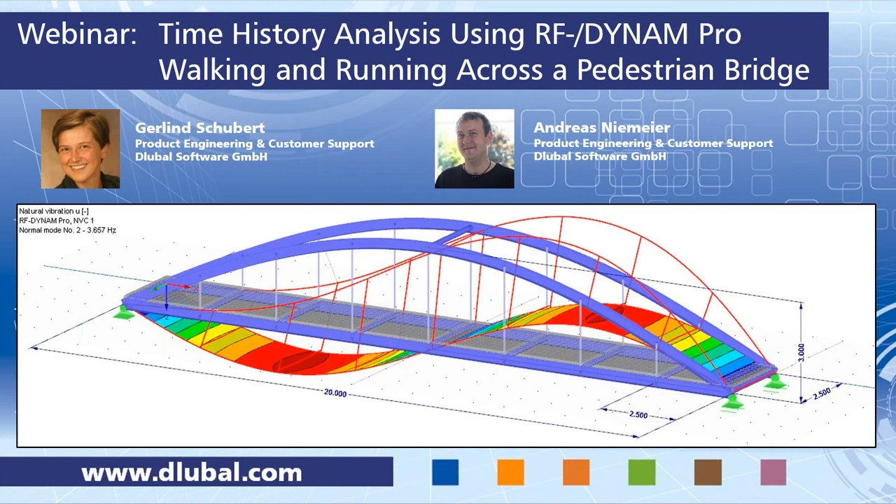We want to talk about time history analysis today and how to use RF-DYNAM Pro, and we will simulate walking and running across a pedestrian bridge. My name is Schubert, I will demonstrate the webinar today and show you the example in RFEM, and my colleague Andreas Niemeier will help me throughout the webinar answering all your questions. This is the model that we look at today, an arch bridge, and the persons we simulate are walking in the center along the bridge here. So we simulate an excitation which is changing in time, but also changing in position. That's the important bit today.

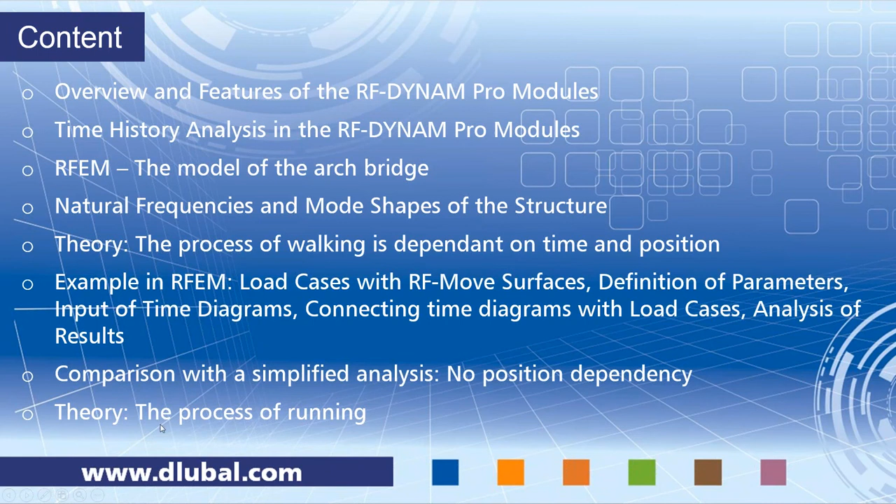Now you know what to expect, and we start with the overview of the modules. We have three dynamic modules in RFEM. This is the same in RStab, so we have two program families, RFEM and RStab.

Dynamic modules exist in both, and they are very similar in both. In RStab, you can only consider members, while in RFEM, you can also consider surfaces and solids. So this is the main difference, but the dynamics modules themselves are very similar. So this webinar is also useful for RStab users, not only for RFEM users. We have the module RF-DYNAM Pro Natural Vibrations.

Which you can use to analyze frequencies and mode shapes for member, surface, and solid models. You can directly import the masses from load cases, and you can combine these mass cases in mass combinations. You can also import stiffness modifications.

For example, to consider the pre-stress of cables, or you can deactivate some members. You could consider the stiffness from RF-Concrete and so on. So this is considered as initial conditions.

The whole dynamic module at the moment is based on linear calculations. We have several eigenvalue solvers available and everything you would expect from a modal analysis, so you get modal masses, effective modal masses, and modal mass factors, and so on.

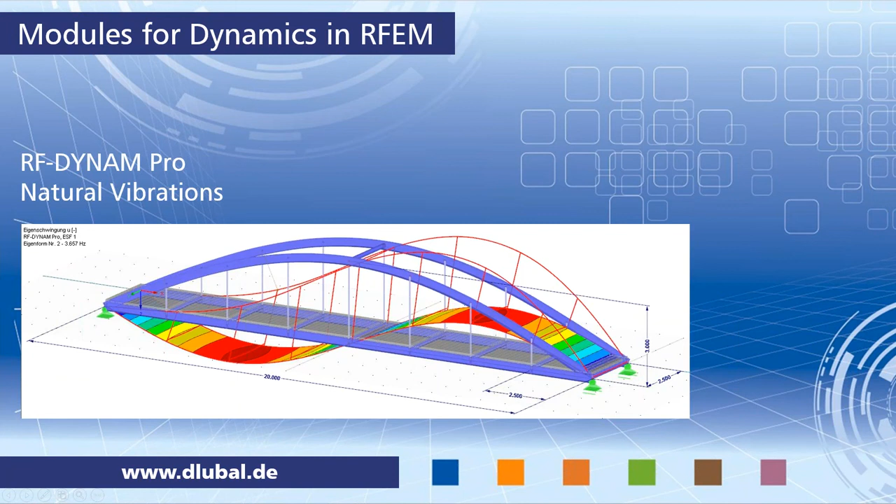Then we have the module RF-DYNAM Pro Forced Vibrations, which is based on the natural vibrations, so you obviously need the natural vibrations as a basis. This module, Forced Vibrations, contains both the time history analysis, which is what we want to look at today, and the multimodal and multi-point response spectra analysis.

So today we consider only the time history analysis, and I'm concentrating here on the introduction only on this one. The response spectra analysis is to perform an earthquake analysis.

This is just a preview of the time course monitor. We will see this later on in the example again. This is how you can see the results in graphs versus time.

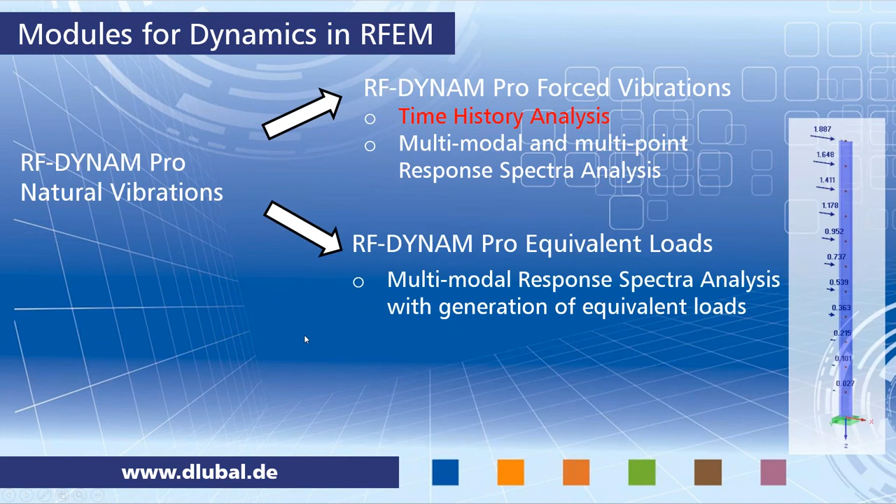And then we have the module RF-DYNAM Pro Equivalent Loads. This contains a multimodal response spectra analysis. It's the same approach, but here you get equivalent loads calculated and exported into load cases, which you can use then in RFEM.

So like in this little example here. I don't go into detail on this equivalent load module. There is another webinar available which I did earlier, about a natural vibration analysis and equivalent load analysis of a framework.

You can just have a look on our website, and you can always see previous webinars. You can download them or watch them directly as a video. That's possible with all of the webinars we did earlier on.

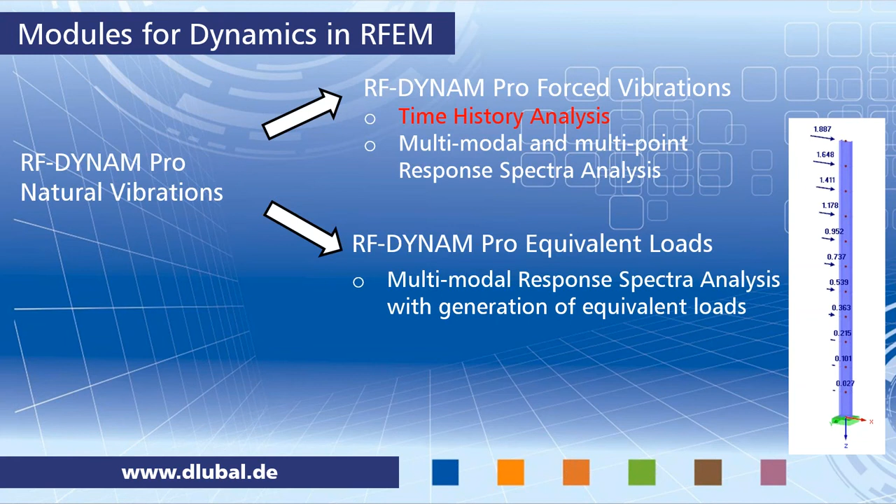As I said, we will have a detailed look into the forced vibrations, into the time history analysis. So we have direct integration implemented, using the implicit Newmark solver. Here also you have different Newmark solvers available in the literature.

We use the average acceleration method, so you could have a look in the literature for further details here. For example, Wilson's Structural Dynamics is just one book I can mention, but there are many good books available about structural dynamics.

Very important for the Newmark solver is to have a small time step. It needs to be small enough to get accurate results. I'll come back to this point later on and give some recommendations for the time step.

We have the structural damping implemented, so you can choose between the Rayleigh coefficients and the Lehr's damping, and you can enter them vice versa. This is converted internally, so you can choose whatever you prefer.

We present the results in a time course monitor and also in result tables. The time course monitor I showed you already, and we will see it also in the example again. You can export results from single time steps, and you can also export result combinations, which is then an envelope over time.

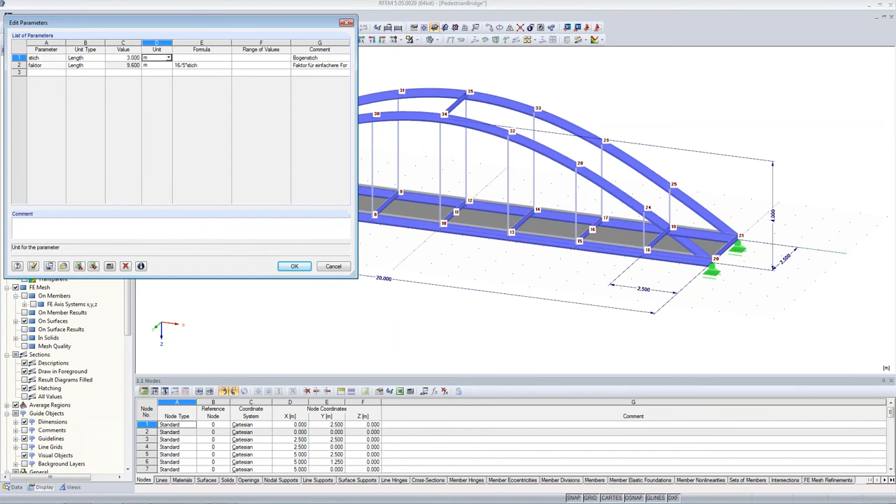So I already used some parameters in modeling the bridge. I want to undo this. So this is as it was originally. So we will use parameters quite often today, and I used them already in the model. I don't want to go too much in detail here.

I defined a thin surface, which is just a thin concrete surface here. This is just a simplified model. Usually you would define an orthotropic surface here. But I need the surface to define my moving loads later on with the add-on module RF-MOVE Surfaces, and that is why I defined a surface.

And there's also a webinar available about how exactly this bridge was modeled and how the parameters were defined, and this is shown in a webinar called Parametric Modeling of an Arch Bridge. And this is again available on our website. I will show you at the end of the webinar how you can access the webinars and how you can download them and so on.

So this is all about the model. We go into the add-on module already. Here we go, RF-DYNAM Pro, dynamic analysis. There are several ways to open add-on modules. You can also open them from here, dynamic, and then RF-DYNAM Pro. And here you see again the separation into the 3 add-on modules: natural vibration, forced vibrations, and equivalent loads. And we start just with the natural vibration analysis, and we don't need mass combinations today. We keep it all quite simple.

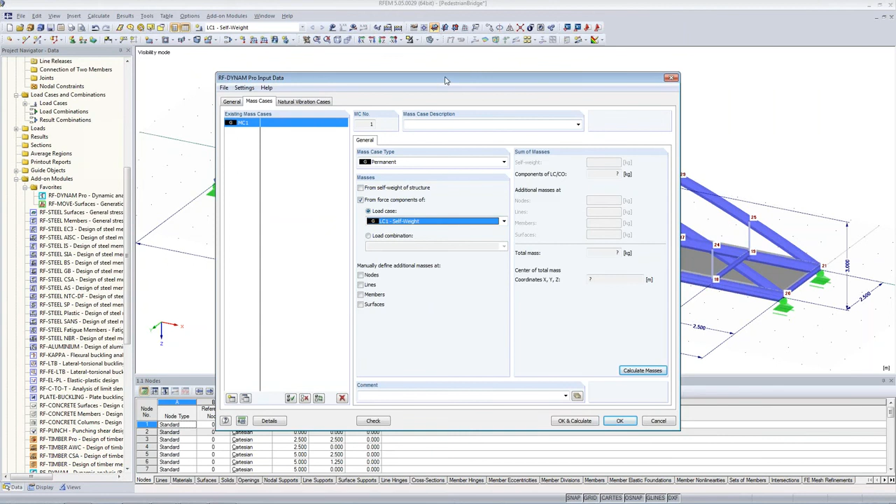I go into the mass cases, and I just want to import the load case self-weight that I defined. And this includes the self-weight of the bridge and another 4 kilonewtons per square meter for further footway structure that is not modeled itself, that I just apply as a load. So I import here the loads of the self-weight load case. And it is important to clear this checkbox here, otherwise you would double the self-weight.

You can calculate the masses internally if you want. If the model is too big, I don't really recommend this, but you can. This is for double checking the masses you actually import here. You could also define nodal, line, member and surface masses if you need, so you can define them manually to add, for example, something which is not modeled itself or which is not included in a load case. You can add this manually here. So just as an option. So you have several options already here.

Then we have the natural vibration cases, where we import our mass case, and where I want to have a look at the first 10 eigenvalues. And I just apply a diagonal matrix, which only considers the masses in translational directions. And I use the Lanczos solver, which is recommendable for this size of structure. So it's not as big. It's a quite quick solver here.

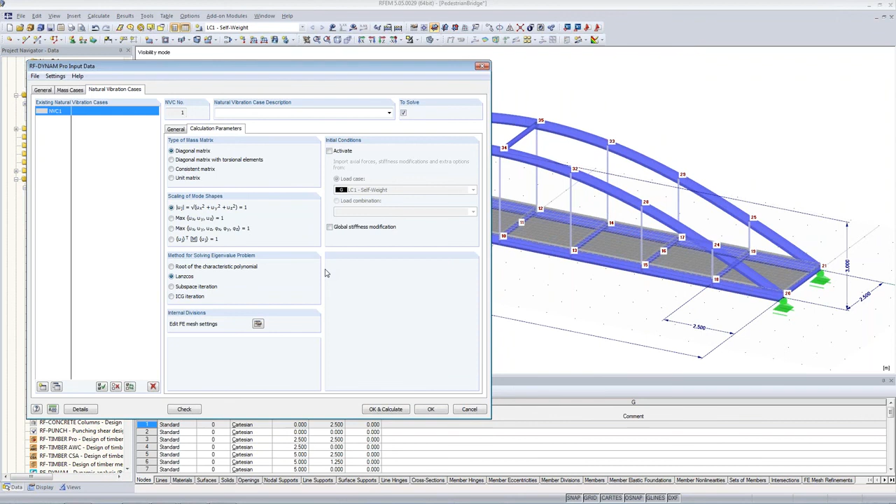It's quite fast. Here's the part where you can import the stiffness modifications, as I said in the introduction. But I go more into detail of these natural vibration cases in the other webinar I mentioned already. And I show you at the end where you find it so that you can watch it afterwards. So here we go. I just want to calculate the natural frequencies first of all.

So we have the dynamic results available in the main program RFEM. You reach them with this button, that's table 5, dynamic analysis. And you have several drop-downs here. At the moment, we have just one natural vibration case. That's why the drop-down doesn't contain anything else. We will see this increasing later on. And we can select the mode shapes in this drop-down, or we can just go through the table and look at the mode shapes in the graphic. This is updating automatically.

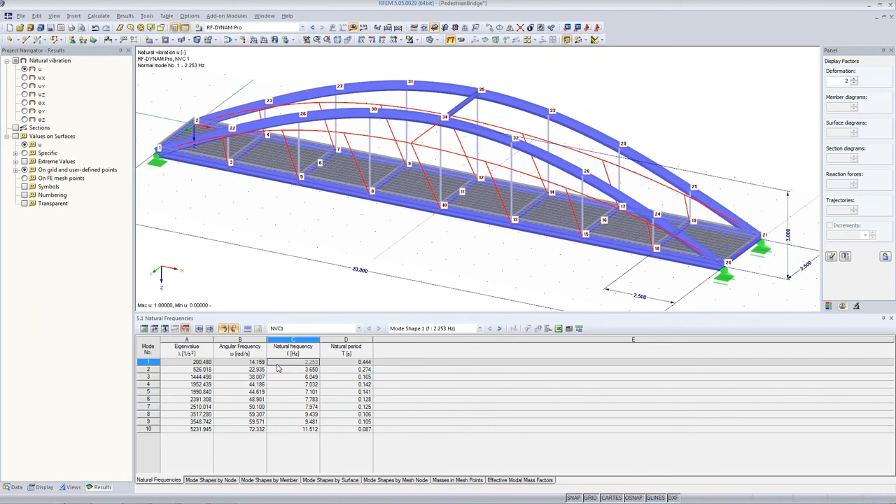So let's have a look at the first one. This is just the arc going to the side. And this one is relevant for us. This is the second mode shape with 3.65 Hertz. And this is the most relevant shape for us today, because this is the shape of the footway.

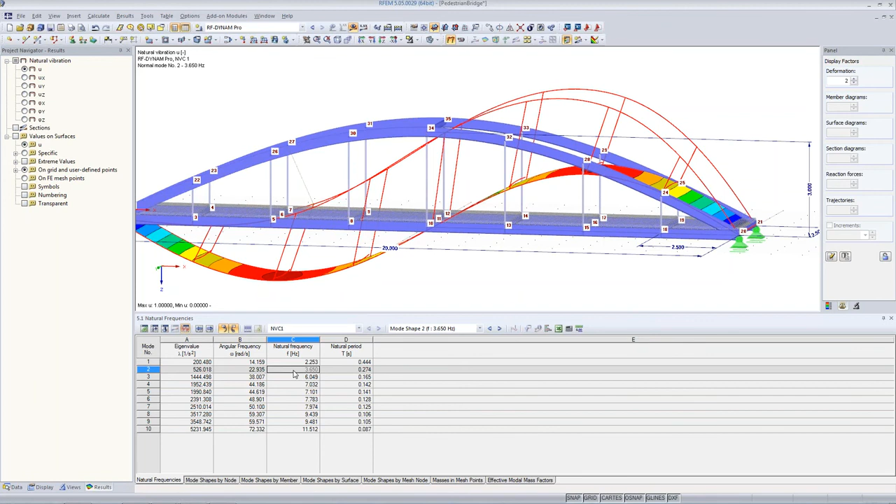And what we learn also from this mode shape is that our critical load points are in the quarter points of the bridge. So it's not in the middle of the bridge, it's in the quarter points. And the frequency, 3.65 Hertz, is below 5 Hertz. This means we have to consider the dynamics. We have to study this. As you all know, pedestrians are walking with approximately 2.5 Hertz. So this is relevant today.

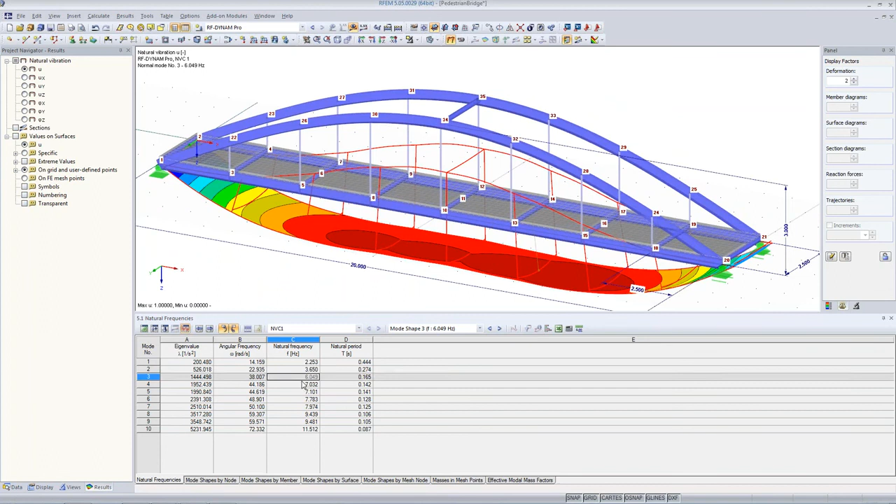Okay. And we can have a look at the other mode shapes just to complete this. So here the footway is going down. Here we have a crossing arc. Here this is twisting. The whole footway is twisting. Second mode shape of the arc. And the third mode shape of the footway.

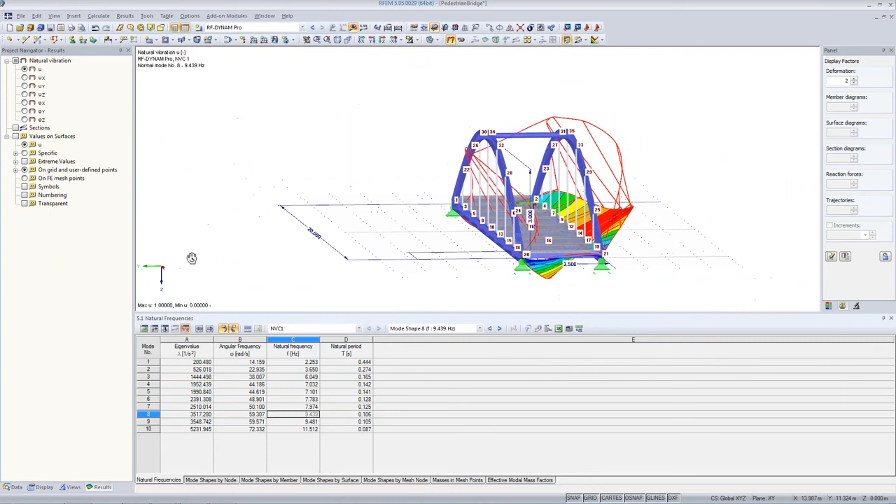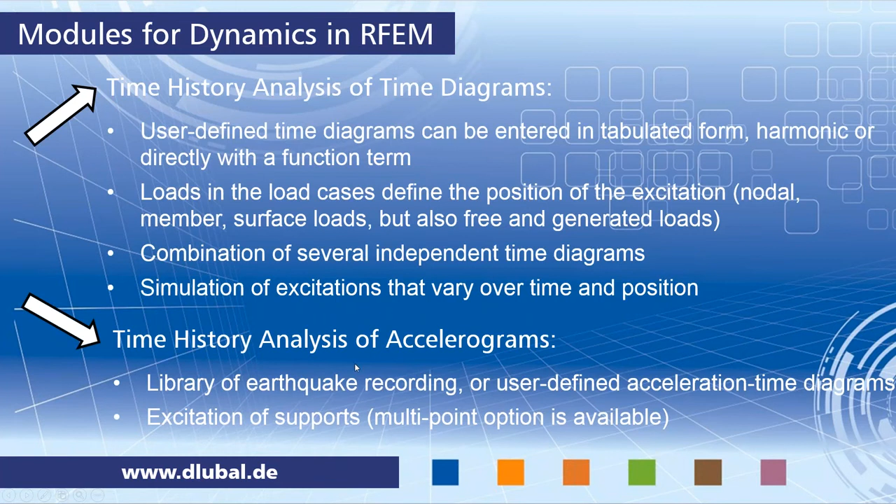And this is drifting away completely here. And the last one I want to show you is this one. Okay, so quite interesting mode shapes. For us, the most important mode shape is this one. So we go back to the presentation, and I want to come to the details of walking.

A walking person is usually walking with a step frequency between 1.7 and 2.3 hertz, and with step lengths of 60 centimeters to 1 meter. So this is usually the case, and you have to choose whatever is the worst case for your structure. In our case, we have a field length of 2.5 meters. So we will use a step length of 62.5 centimeters to be exactly in the center of every field. This is what you have to think about before you actually work out all these formulas. It depends on your structure.

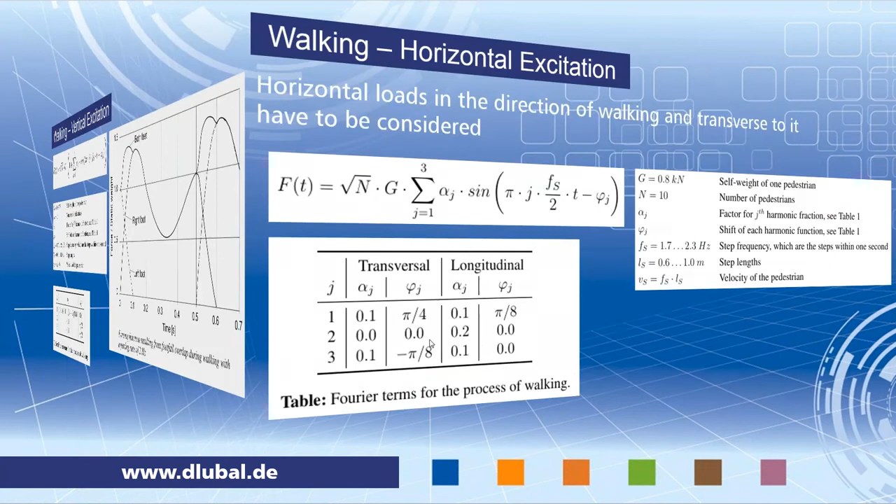The next one is the walking. Walking also leads to some horizontal excitation, which comes from the push of the foot in the direction of walking and from the movement of the upper part of the body transverse to the direction of walking. This is much smaller than the vertical load, and it only considers half of the step frequency because all this is only happening either in the left or the right direction.

So I just want to show you this formula here. It's quite similar. It's a sinus function as well. It consists of 3 Fourier terms, and you have the weight of the pedestrian. This is the number of persons. I'll come back to this later on. We had this in the formula for the vertical excitation as well. I'll explain later how this is calculated or what kind of assumption you have to make here.

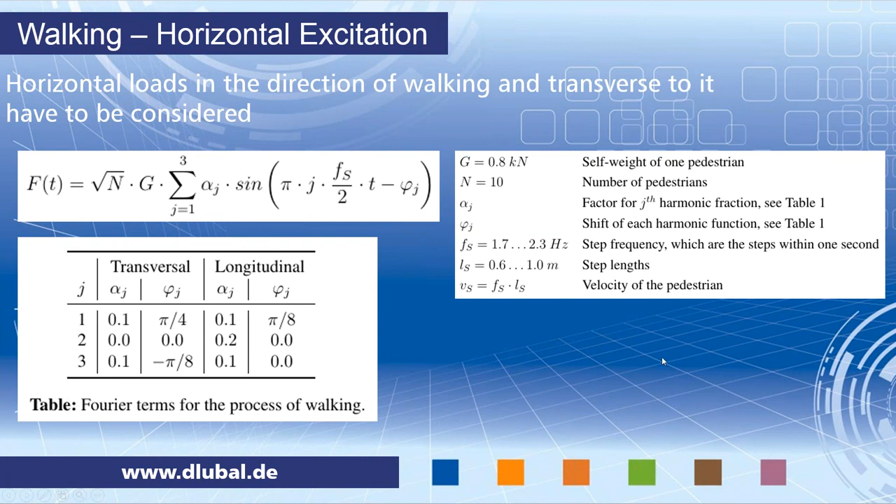We don't consider the horizontal excitation in our example today, but this might be quite important, and you have to consider it if your bridge is quite soft in the horizontal direction. So this might be important, but it's too much for this 1-hour webinar today. That's why I excluded it from today's example.

As I said, we come back to the number of persons. Multiple persons on a bridge do not increase the load by the same factor. These persons are not walking synchronously, they are just walking randomly. So that's why you don't multiply by 10 because you have 10 persons on the bridge. That's why in the formula you have the square root of the number of persons.

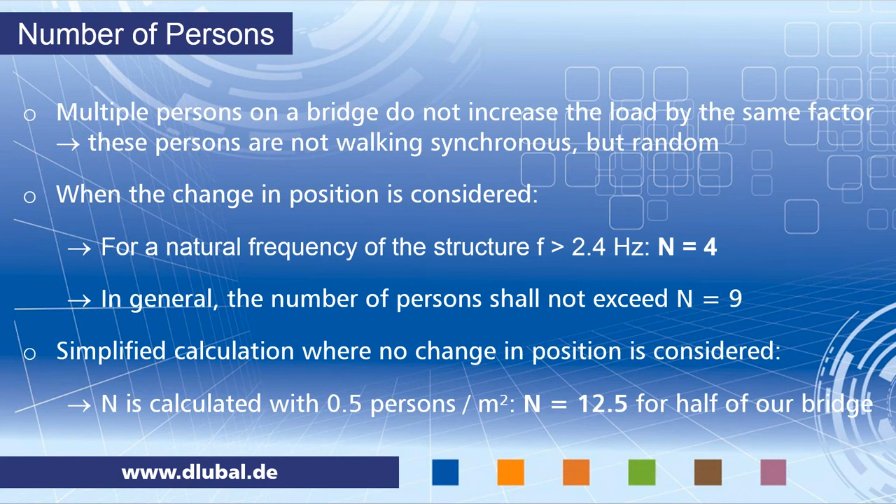And then you have to think about how many persons are actually on the bridge. If there are too many persons on the bridge, then you don't consider a dynamic problem anymore. If you think about a stream of pedestrians or a crowd, then this is not dynamic. These persons are not walking or running anymore, they are kind of moving slowly, statically. We want to consider the dynamic case, and you find several assumptions in different standards. For example, the Eurocode suggests 10 to 15 persons, and it also depends if you consider the change in position or not.

So we start today with the detailed implementation. We study the change in position, and I found the recommendation: if the natural frequency of the structure is greater than 2.4 hertz, which is the case for us, you have to consider 4 persons walking along the bridge. And in general, the number of persons shall not exceed 9.

When you do not consider the change in position, so when you simplify the calculation, then you need to consider more persons. Then you should consider half a person per square meter, which would mean for our whole bridge 25 persons. But that's not realistic in our case, because our relevant mode shape, as we have just seen, is the second mode shape. So our critical load points are the quarter points, and that's why it's more realistic to consider only half of the bridge. So in the case where no change in position is considered, I would assume 12.5 persons on the bridge.

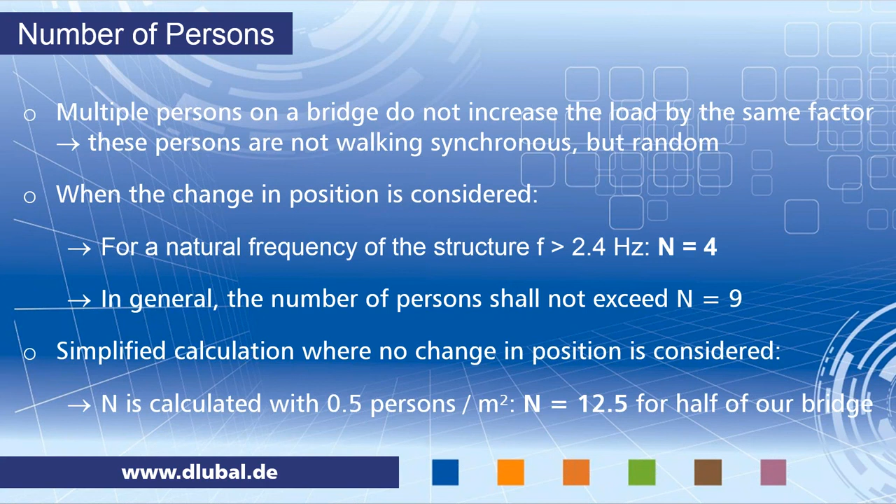So these are assumptions. It's not very well regulated in the standards. Then I already said that the choice of time step is very important. This is a compromise between accuracy of the results versus calculation time. The smaller the time step, the longer it calculates, but the more accurate the results. There are some recommendations available: you should choose the largest natural frequency of your system that is relevant for the system response, apply this formula, and then you get a delta t.

In our case, the relevant frequency of our system is 3.6 hertz, and this formula leads to 0.014 seconds. The second one, also relevant, is the largest frequency of the excitation function. So not only the structure is important, also the excitation function. The largest one is 6 hertz, so we end up with 0.0083 seconds, which is already a bit less. I did a convergence study in advance of this webinar with larger and smaller time steps, and I ended up with 0.01 seconds being good enough and leading to accurate results.

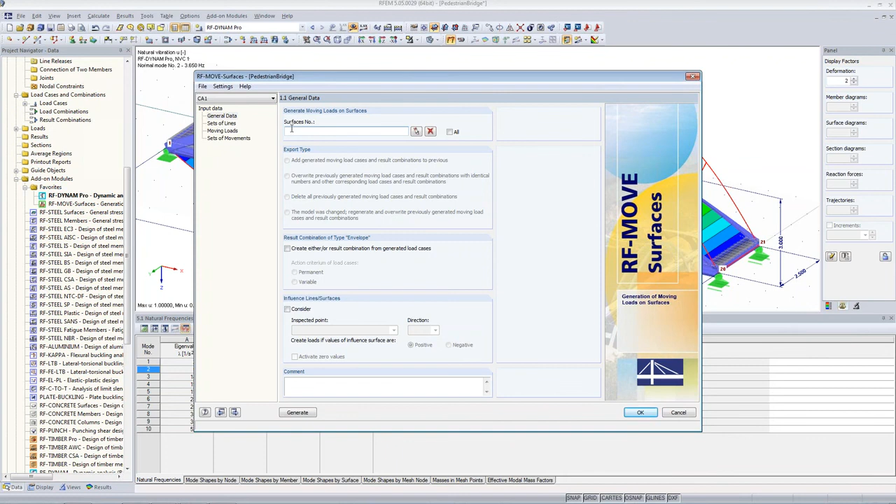We want to have loads on all of our surfaces, so I apply the checkbox all surfaces here. This is all I have to do in the general data. Then the sets of lines. We have these pictures here that help us understand what's going on. I start with the right foot. As I said early on, we will have a step length of 62.5 centimeters. This means that the right foot comes to the ground every 1.25 meters. That's the moving step, 1.25 meters up here. And I apply also an offset at the beginning and at the end.

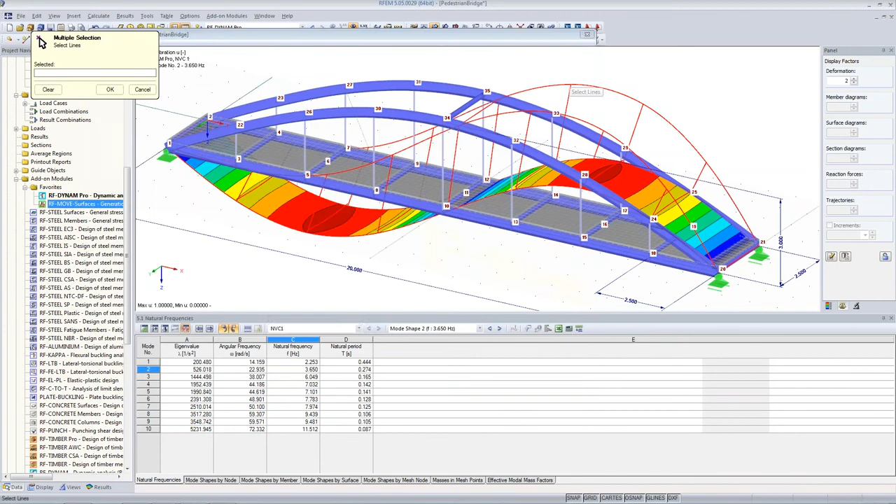Here I have to choose some lines, select some lines, and I select those lines here. And then I have to define an eccentricity from there, so to define how far away from this line my persons are walking. So in my case, I want the persons walking in the center of the bridge, and I decided to have the feet 30 centimeters apart from each other. This is something you could neglect, but I want to study this today.

So I say that my right foot is 1.1 meter from these lines we've just selected. And I have to apply a minus here. This is something you have to try. It depends on the direction of your lines. And my lines are going away from node 20, so that's why I apply a minus here. So this is the right foot.

I create a new set of lines, which I call left foot. And this is with the same moving step of 1.25 meters. And now I have a larger offset. This is something you have to try out. This is just because my left foot is one time less on the bridge than my right foot. Well, it's just through the process of walking. So minus 1.4, as I said, 30 centimeters apart.

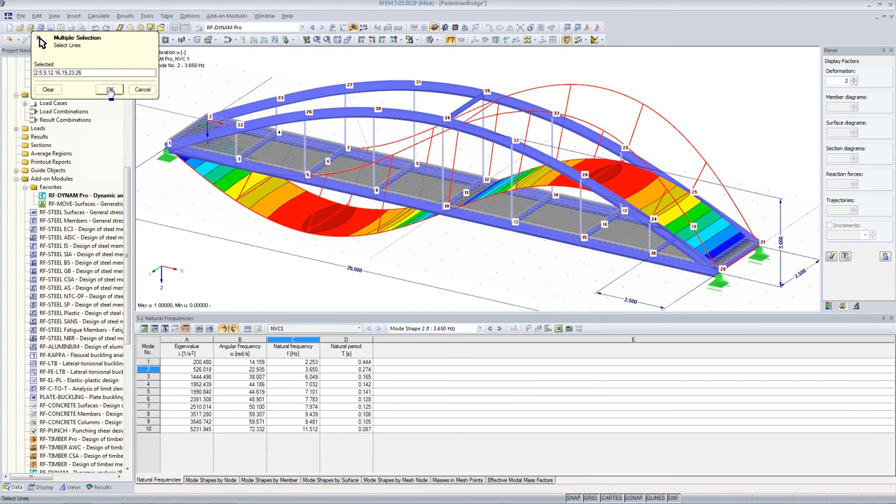So the next one is moving loads. We have both feet. So this is just the load itself we define here. So both feet, which is a concentrated force. And I want to just define 1 kilonewton here. That is because I want to define all the multipliers and the actual size of my force in the module RF-DYNAM Pro, because in RF-DYNAM Pro I can use parameters, and this makes it more flexible at the end.

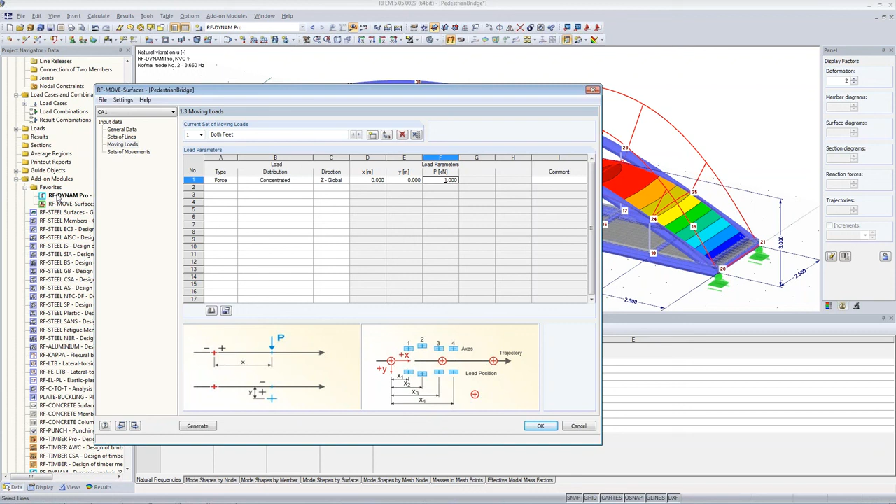So this is why I've decided for 1 kilonewton here, so just unity, and I apply all the multipliers later on in RF-DYNAM Pro. So this depends on you. You could also define the weight of the pedestrian here, and then you would not define it in RF-DYNAM Pro. It's just a multiplication. Okay, and then we define a set of movement where we define the right foot,

and I just choose the right foot and my load we've just defined, and I want to have all these created load cases in the earthquake category. Not because I'm studying earthquake, just because nothing else really fits. So I have chosen earthquake, and that's okay. So we know where it's coming from. It's a dynamic study we do here.

So I create another set of movement, which is the left foot. And again, I choose the left foot, and here both, and that's earthquake. And you see now that the current set creates 15 load cases, and altogether we will get 31 load cases. And now I click generate, and I want to exit the module, yes.

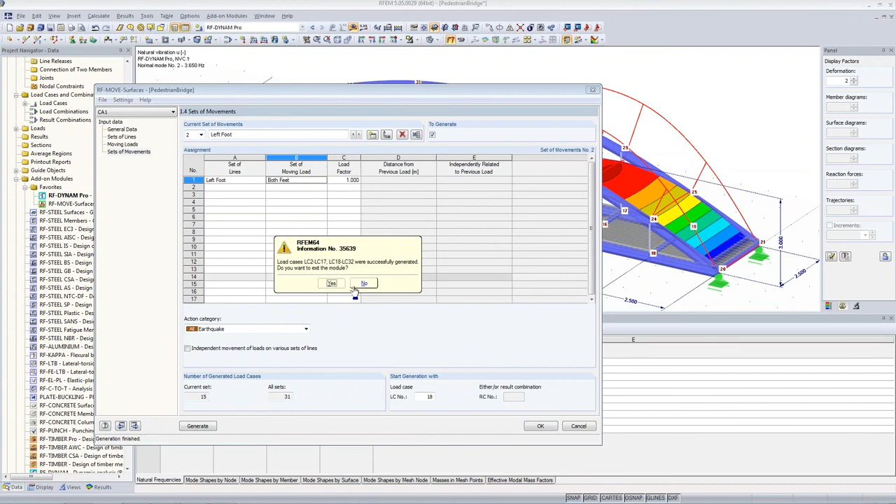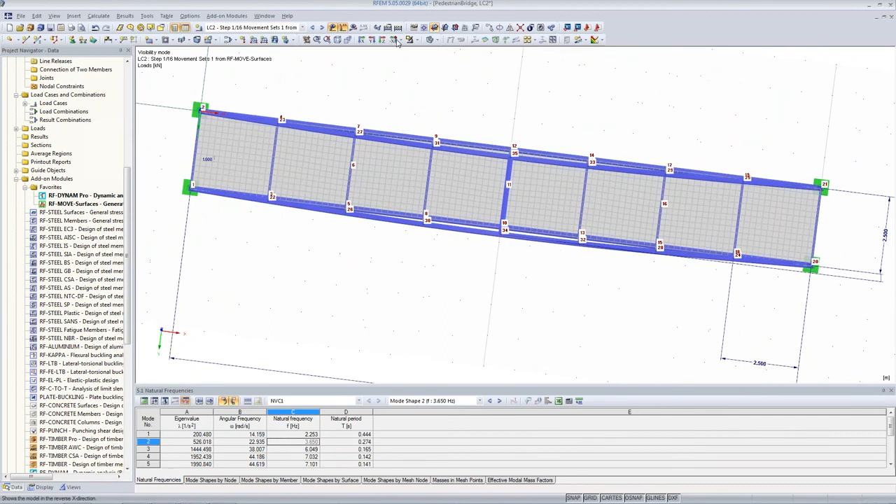And now I can show you what we did. We created all these load cases, and as I said, it's just a nice tool to make this a bit faster. So when we have a look in Z direction, make these tables a bit smaller, we see our loads. Yeah, here it's the 1 kilonewton. So now this is the right foot moving along, and after that follows the left foot. We have to connect this then in the right order with our time diagrams. So, okay, that's us done with RF-MOVE Surfaces.

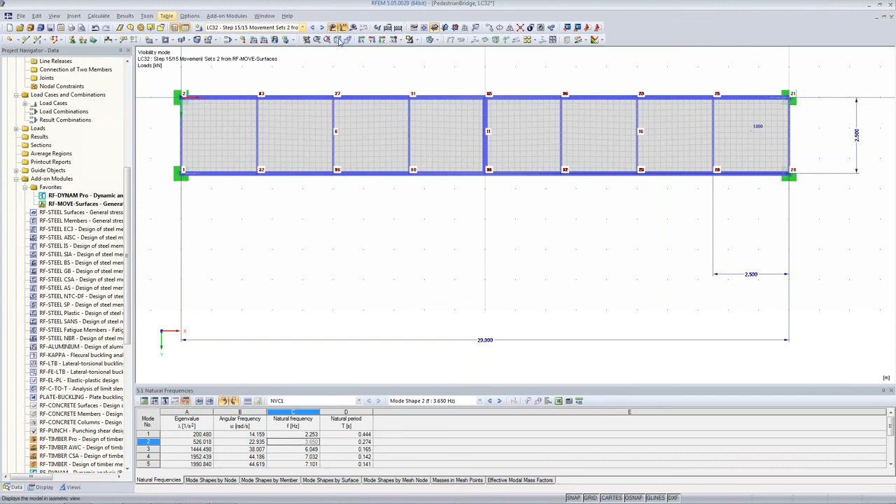Now I want to define a few parameters that we need for the definition of our time diagrams. So I go again into edit parameters, and I define here the parameter G, which is a force of 0.8 kilonewton. So that's the self-weight of the person, which we have seen in the formulas. And we have N, which is the number of persons, which is dimensionless. So you have quite many different unit types available here.

And I've said earlier that we have to consider 4 persons when we consider the change in position. So we have to apply 4 persons, number of persons. And then we have the step frequency, which is Fs. There's no frequency available here, but it doesn't really matter in our case. So I just choose dimensionless, and we start with 2 Hertz. So we study a step frequency of 2 Hertz.

I just make a note here that this is actually in Hertz, so I don't forget. And this is all the parameters I want to define.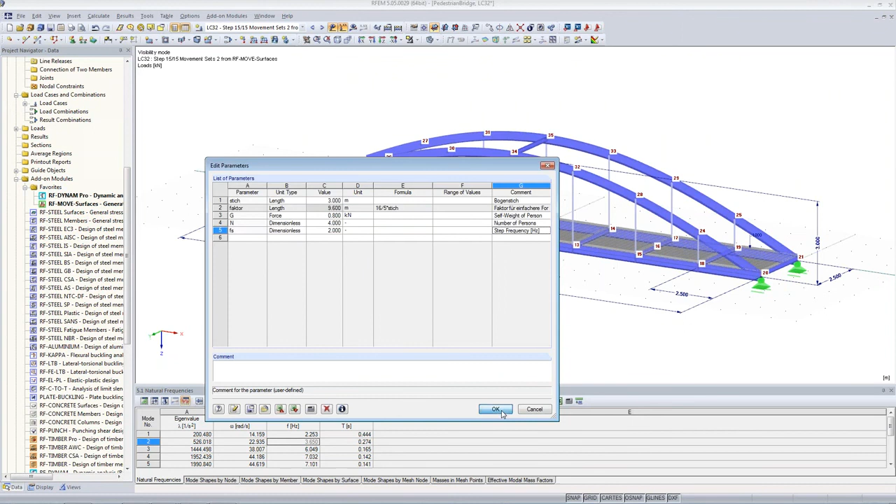Now I can go into RF-DYNAM Pro, and we want to study time diagrams. So we activate the forced vibrations module and we activate the time diagrams. And now we have two more tabs here, the time diagrams and the dynamic load cases.

I show you the time diagrams. I said in the introduction that you can define it in tabulated form, so you can enter whatever you want, or you can import it from Excel. You can define a function as periodic, where you have to provide the excitation function, the excitation frequency and the shift. And that's what we want to do today.

You can define a function directly here in the edit fields. So when I get started with the right foot in position 1, I have to enter the formula, and I start with the sinus function itself and then apply all the multipliers. So it was 1 plus the first Fourier term, which starts with 0.4.

Then we have the sinus function multiplied with the sinus function of pi 2 Fs and t. So t is the only parameter that you shouldn't define yourself, because t is used by DYNAM Pro as the time. So it's kind of a pre-used parameter, and you are not allowed to use it. If you do, DYNAM Pro cannot use it anymore, and you end up with an error.

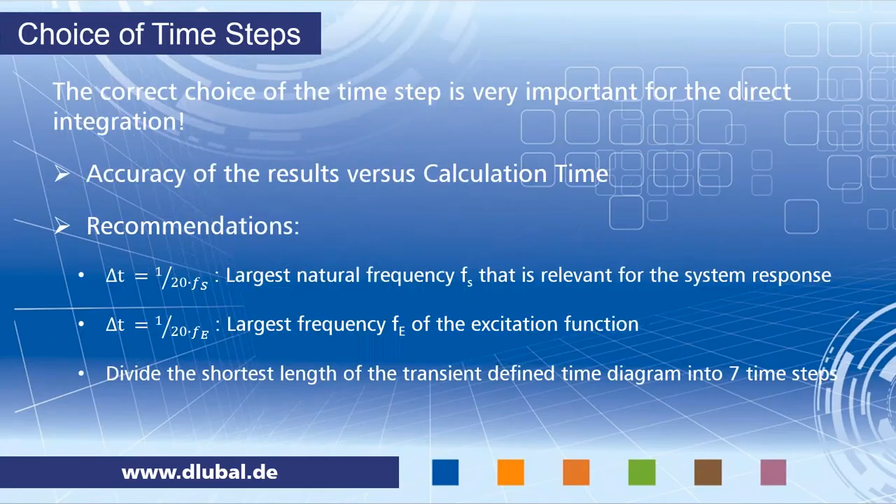That looks already like what we have seen in the PowerPoint presentation. So I go back to this, back to walking vertical. This is the function we just applied: the term in brackets, 1 plus, and then the 3 Fourier terms, which are the alpha values, 0.4, 0.1, and 0.1.

And then I have the 2 pi multiplied with j. J is just increasing with 1, 2, 3. And then we have the step frequency and the shift.

What's still missing is the square root over n and the self-weight of one pedestrian. Here we have to be careful because the self-weight of the pedestrian was entered in kilonewton, but internally in RFEM, everything is used in Newton.

So I have to divide my G by 1,000 to really get my kilonewton. This is a bit tricky, you just have to be careful. I defined 0.8 kilonewton in the parameters, but internally now 800 newtons are used.

Then I have the square root over n multiplied, and this is the formula I'm using finally. I'm just looking up to 0.47 seconds - this is what one foot is doing. The right foot on position 1 has the maximum of the heel and the maximum of rolling over the ball.

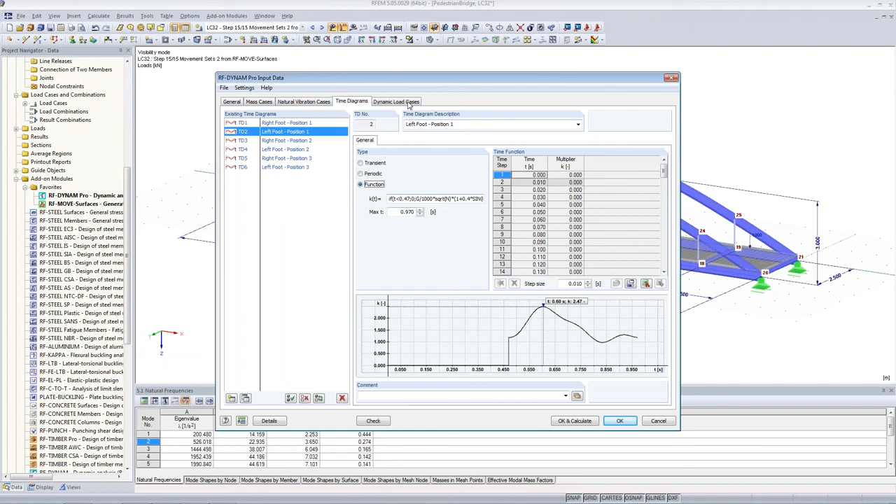So now we go to the dynamic load cases, and I'll show you what's going on here. Here too, we will start entering everything, and I will then open a ready-made position where I've made all the input. So this is my dynamic load case - this is the walking in vertical direction.

We will apply the direct integration, which uses the implicit Newmark solver, as I explained in the introduction. Here I will enter the time steps. As I said, I did a convergence study of time steps, and I came up with this. This is leading to very accurate results - fine enough, we don't need any finer time steps here.

I want to consider this up to 15 seconds because it takes 15 seconds to walk across the bridge. I want to export result combinations, and I could also generate load cases for the single time steps - this is here. I don't want to do this today, but this is something you could do.

Then I want to consider a damping. This is just a steel structure, so I don't damp it as much - it's a small damping value I enter here. And this is now the important bit for us - this is the point, the location where we combine the load cases with the time diagrams we have defined.

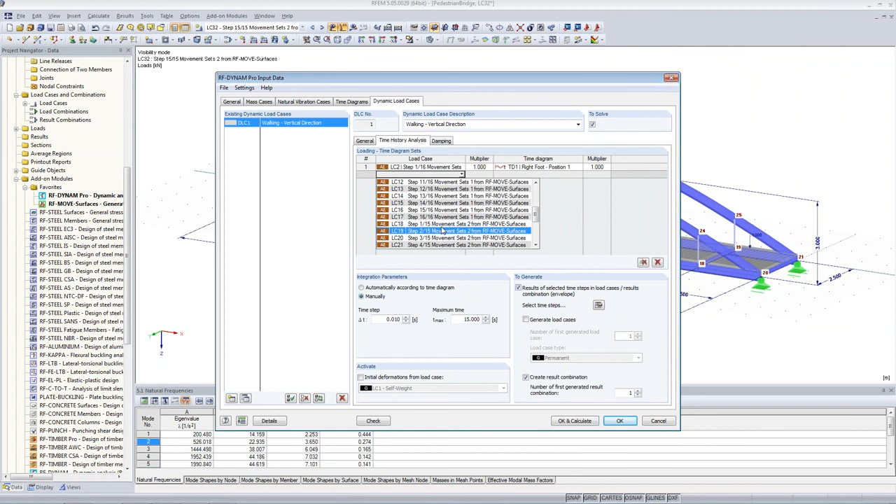So I choose the first load case, which is my right foot on position 1, and combine it with time diagram 1. Then step 115 combined with time diagram 2. And time step 2, load case step 216, the right foot again on position 2 with time diagram 3, right foot position 2, and so on. So this is what you have to combine now.

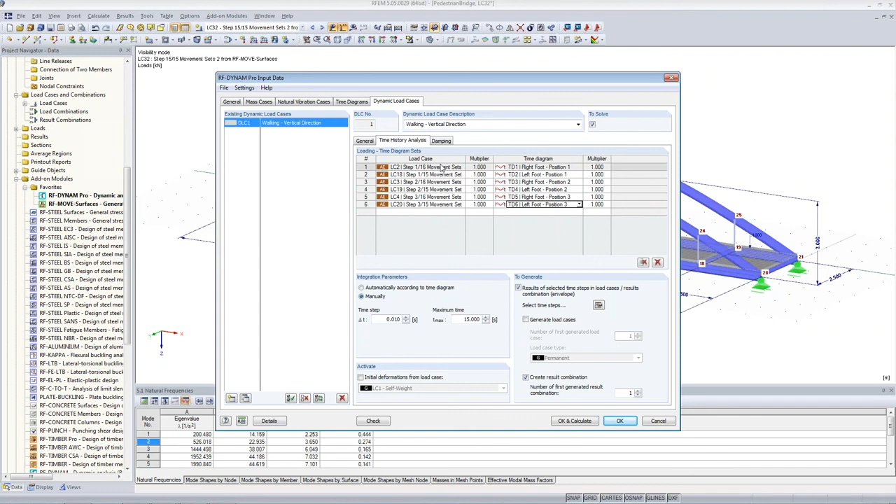215 TD4, 316 TD5, 315 TD6, and so on. So this is something I don't want to finish here in the webinar, because again, you would just sit here and watch me doing this for maybe 10 minutes. So what I do is just click OK now to close this, and I've opened another position already.

Same bridge, same model, everything done as we did so far. I'll show you what I did in Dynam Pro - I already entered all these positions, so we can have a look through. We started with this one, and I stopped with you together here, and I did go ahead then. So this is just moving along the time scale.

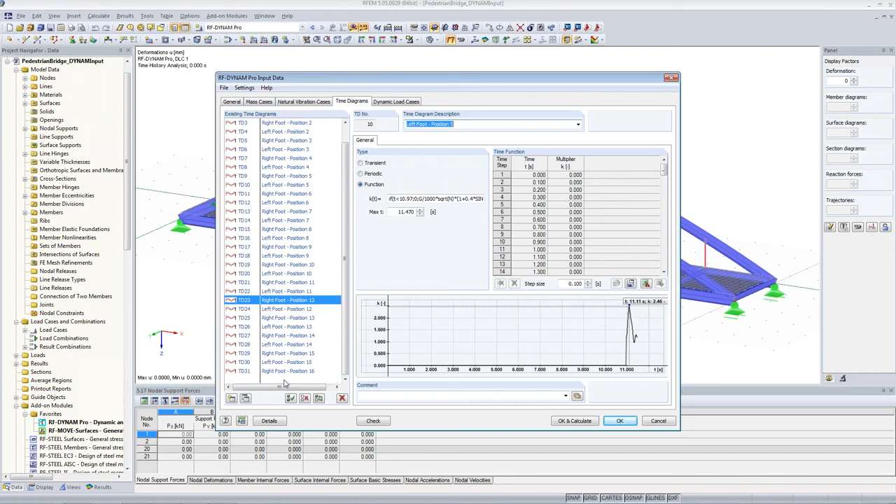I did already prepare the dynamic load cases, walking - vertical load, where I combined here all the load cases with the time diagrams. The time step - we discussed this. I export result combinations, and I entered the damping here.

It's already green - I did the calculation already. It takes maybe 3-4 minutes. We'll do another calculation today, so you will see how long it actually takes. But to save some time here, it's green, so this green color indicates that the results are available.

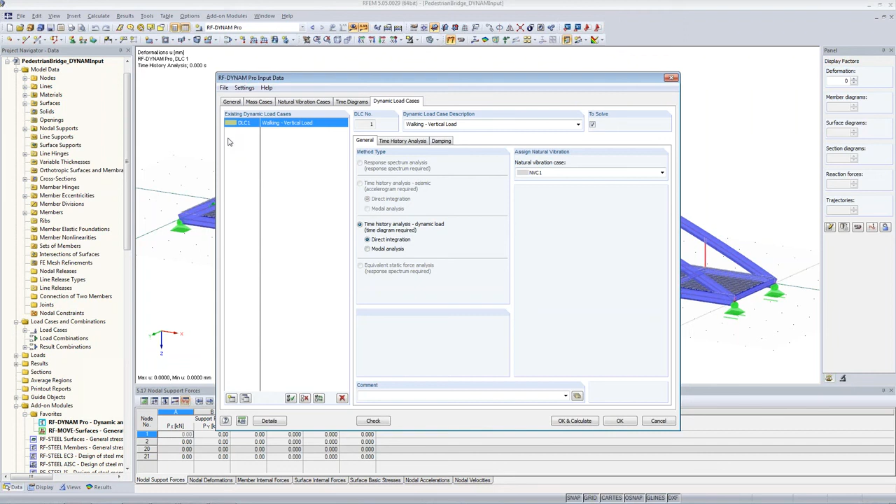When you right click on this case, you could delete the results, or delete the whole case, or you can clear and select this checkbox over here to solve. So we keep it as is. It's green. I click OK. Now I want to show you the results.

I'll show you first the result tables down here. Here are the dynamic results, table 5. Now we have not only the natural vibration case, but also the dynamic load case. Because we did a time history analysis, we have all the time steps available, so we could watch all the results for the single time steps, and we can look at the dynamic envelope.

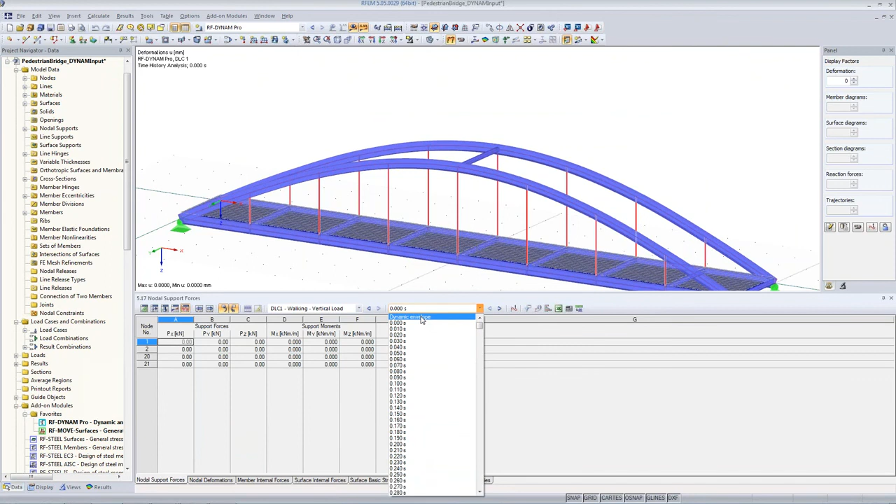So here we go, we look at the deformations at the moment, the deformations U. We get maximum deformations of 0.45 millimeters, which is reasonably small. You have the nodal deformations, member internal forces, nodal accelerations, and nodal velocities.

Important here, we have a direct link from the dynamic tables to the units and decimal places, so you come directly into RF-DYNAM Pro. Some of the results are linked to RFEM, depends a bit on which table you are in, but you're always directly linked to the correct table here.

Now we are in RF-DYNAM Pro in the results, and we could, for example, change our accelerations to millimeter per square second, or we have the imperial units available, which is inch, feet, and yard. We stay with meter per square second because that's quite easy to compare with the acceleration g, the acceleration of gravity.

And here the same, you can change from millimeter, and this is all available. Also for the masses, you could change it into tons and ounces and so on. This is just to let you know, you can increase the decimal places. You have the same for the input data, and the same for all the RFEM results in general. So we have here inch, feet, yards.

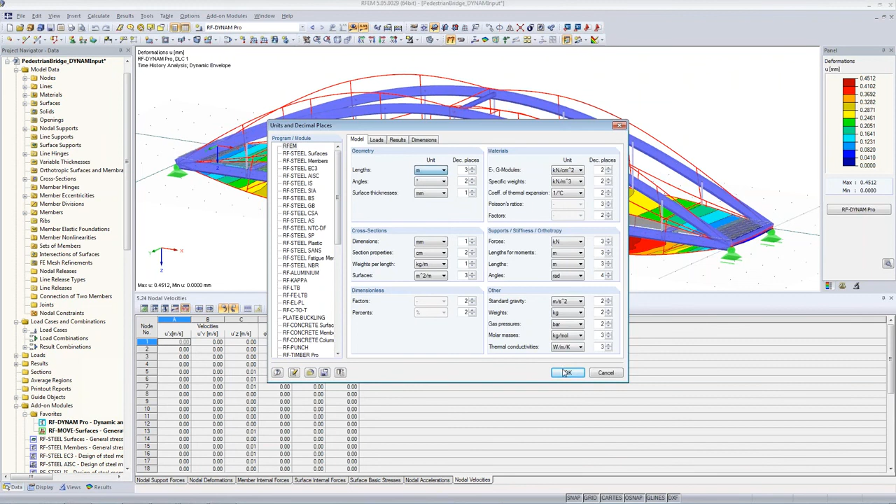A very important tool is the time history, the time course monitor, which you find either here or also in the control panel, time course monitor. So we want to have a look at this.

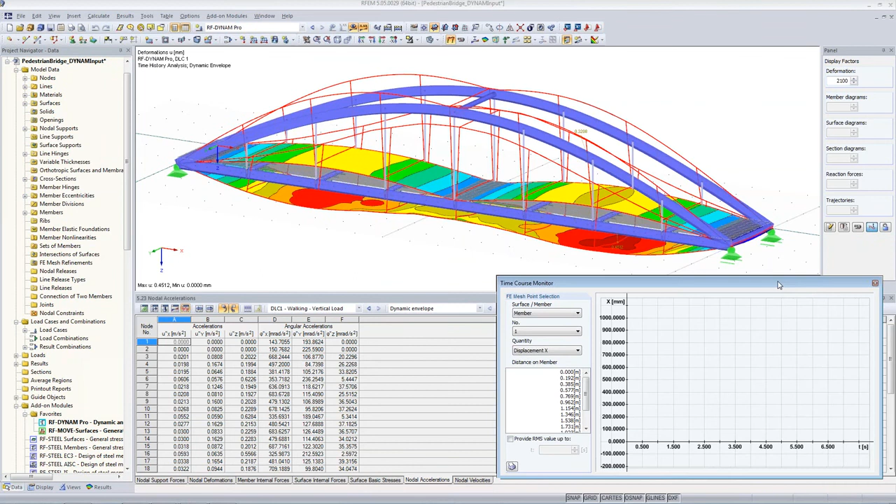I created nodes when I switched off the results here. I have to switch on the node numbers, members. Here I created node 6, which is in the quarter point. I created node 11, which is in the middle, and node 16, here at the 3/4 point. So 6 and 16 are quite likely the nodes where we expect the maximum results, these are the nodes where we will study now the results.

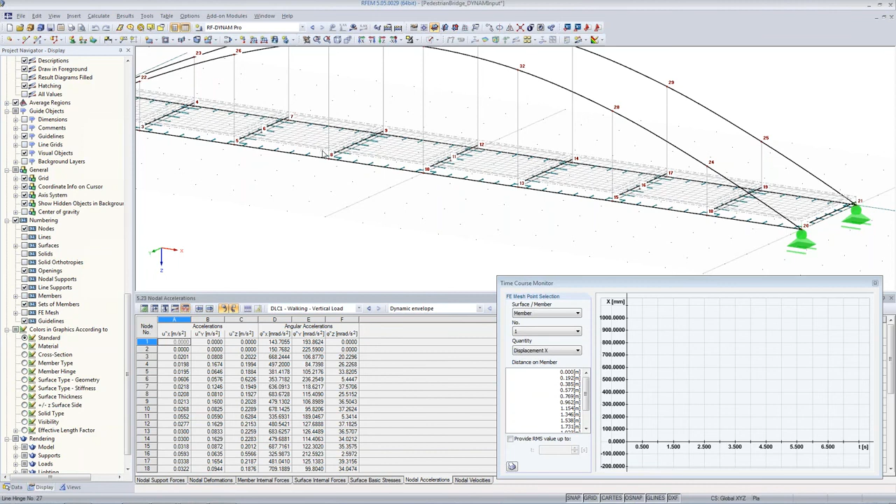Okay, so these are all interacting. When I click now on node 6, my time course monitor is getting ready and it's loading the data from node 6, and I want to see the displacements in Z direction.

We have maximum deformations of 0.4 millimeters here. We can also look at the root mean square value up to 15 seconds, which is often quite useful, especially when we look at the accelerations. So we'll have a look at the accelerations in Z direction as well. We have quite a few peaks when the person is exactly at this position, walking along node 6, and this is where we see the peaks now. But when we look at the root mean square, it's a quite reasonably low acceleration, which is acceptable, and also the peaks are still quite low and reasonable.

So we can look at the other nodes as well. You can use the control key on your keyboard to select more than one node. So I could add node 11, and now you get both on the graph, and I can add node 16. So you end up with a timeline graph here of all 3 points, just to show you again, the displacement in Z direction.

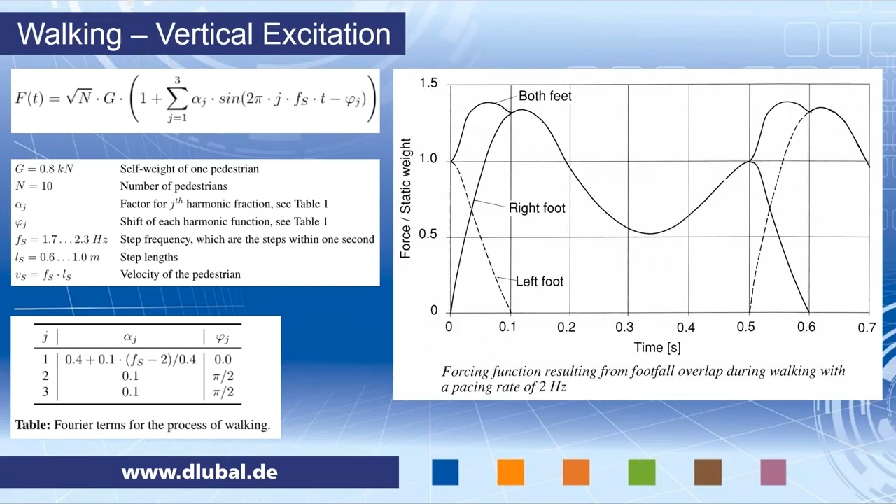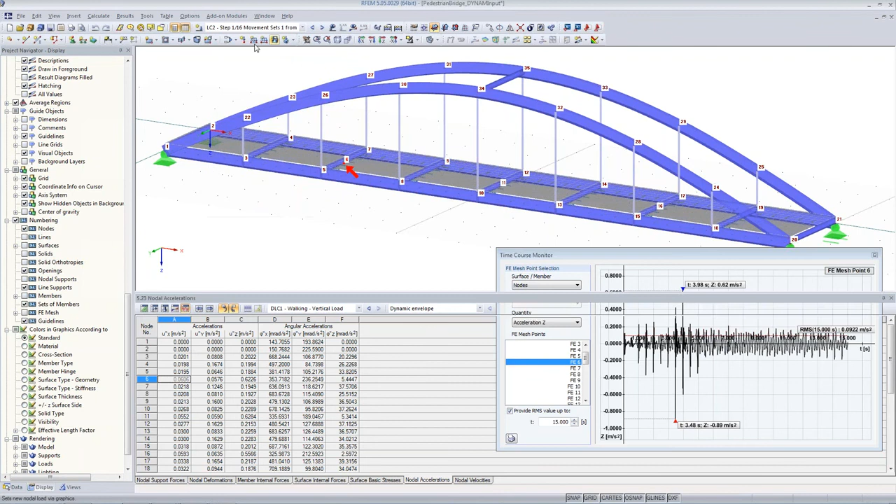So this is us now done with the detailed consideration of the walking in vertical direction. We only consider the vertical case, and we did this very exactly. We combined all these load cases with our time diagrams, and we considered the change in position.

Now I want to emphasize again, you can use these parameters that you've entered here. You can change the self-weight of the persons, the number of persons, and also the step frequency, because what you've entered in DYNAM Pro is all dependent on these parameters. So you can easily change this and the time diagrams will adjust, and you don't have to enter this all in the column again just because you want to study different things. So this is quite nice. I really recommend using parameters.

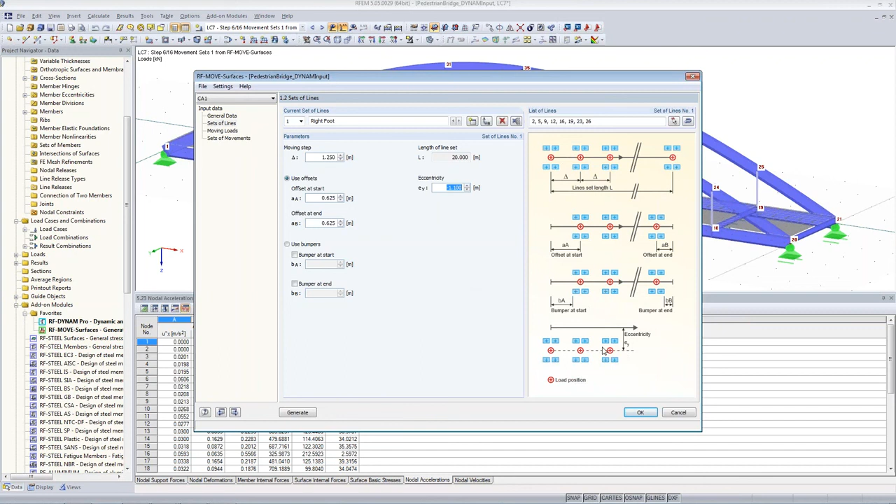Another thing I want to emphasize is we've defined these sets of lines for the left and the right foot, and we've defined the eccentricities, which is the distance between the lines we've selected and our walking person. We've defined a walking person in the center of the bridge, but you can easily change this eccentricity and study persons walking on the left or right part of the bridge. You can generate new load cases, and they are automatically combined if you use the same numbers of load cases, and just run the calculation again to study what happens - are the results very similar, or is it worse if the persons are walking on one part of the bridge, on one side?

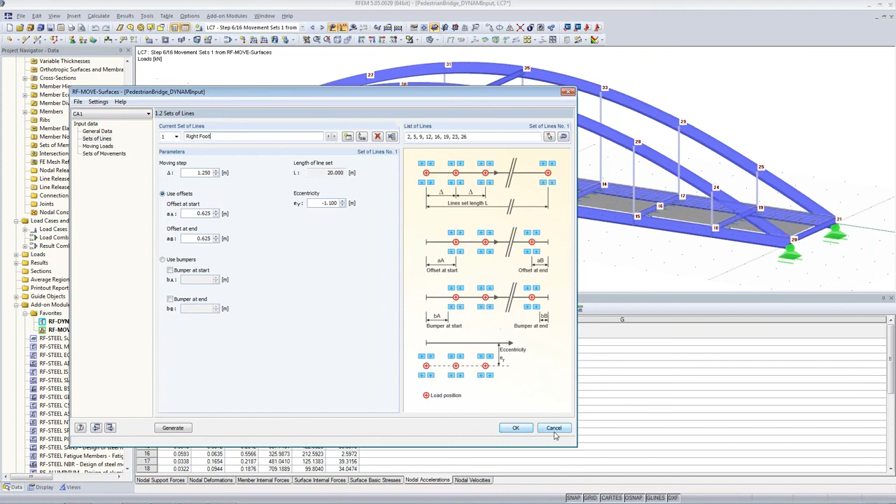To finish up with this example, I want to compare this detailed consideration with a simplified calculation where we neglect the change in position. This is allowed - it's a simplified assumption. I'll cancel this because I don't want to change anything. We could just study persons kind of going around in circles on one position if you want, but you have to increase the number of persons, that's what we've discussed earlier.

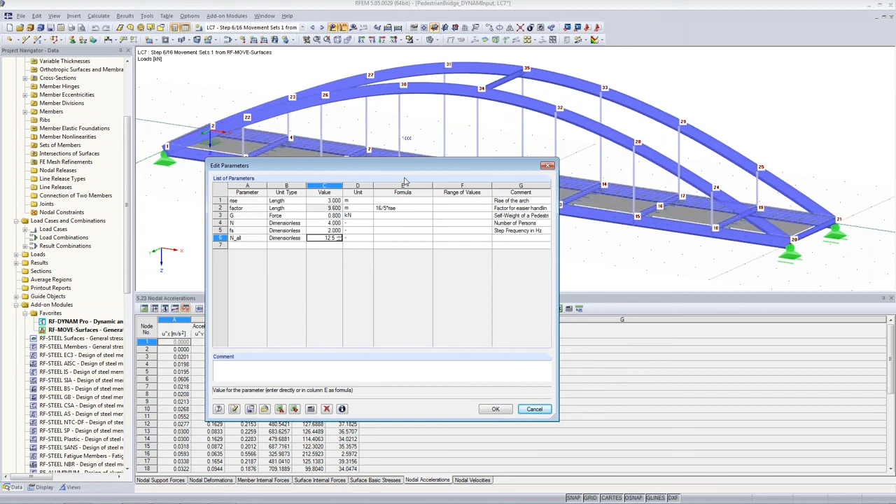So I will edit parameters and enter a parameter called all persons. I said it's reasonable that we consider only half of the bridge, so 12.5 persons walking randomly along this half of the bridge for the number of persons. We also have to think about our mode shapes, so node number 6 is the critical load position. I will define a new load case, which I'll renumber to separate this a bit. I call it load case 40, and I call it no position change.

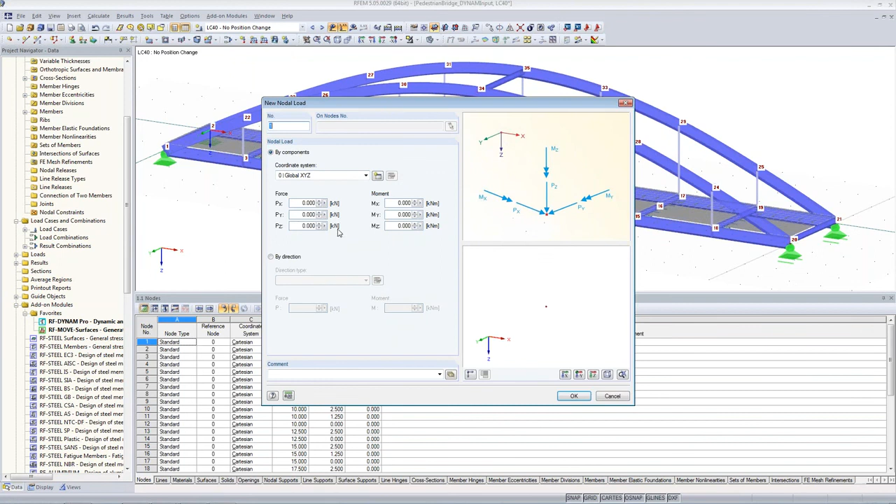And I define a nodal load, a new nodal load, 1 kilonewton in Z direction on the global coordinate system, and I apply this on node 6. Then I go back into RF-DYNAM Pro and define another time diagram - I copy the first time diagram where I did not use the IF function, and I call it no position change. I have this function, and all I have to change here is the parameter.

Now, so far we only considered one period of one foot, but now several persons are going along, so I would at least consider 2 periods here. I would increase the max t to 1 second, or you can even study this a bit longer. But 1 second at least means we have both feet on the ground.

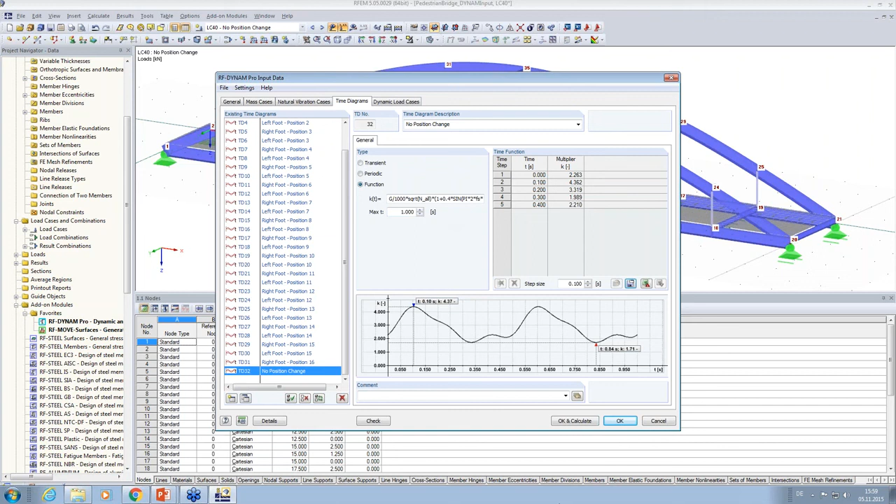Okay, now we go to the dynamic load case and create another load case here. I copy this one - no, hold on, I don't copy this one because I don't want to have this long filled up table. I create a new one and call it no position change.

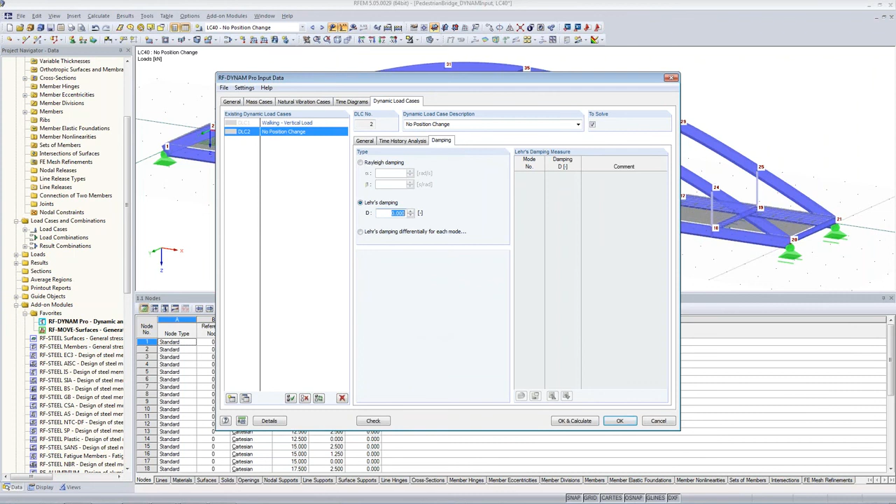And I just combine the last load case, no position change, with the last time diagram. And again here we only consider this up to 5 seconds now, because the time diagram we have defined is only up to 1 second, so this should be enough. And I create result combinations, and I again enter the damping value here, and I calculate. So we are nearly done.

I'm a bit sorry, I'm running a bit late.

So you see the time steps counting up here. So you can imagine, if you choose even smaller time steps, that the time history analysis can be quite time consuming. But it is a very accurate procedure to analyze your structures dynamically. So nearly done.

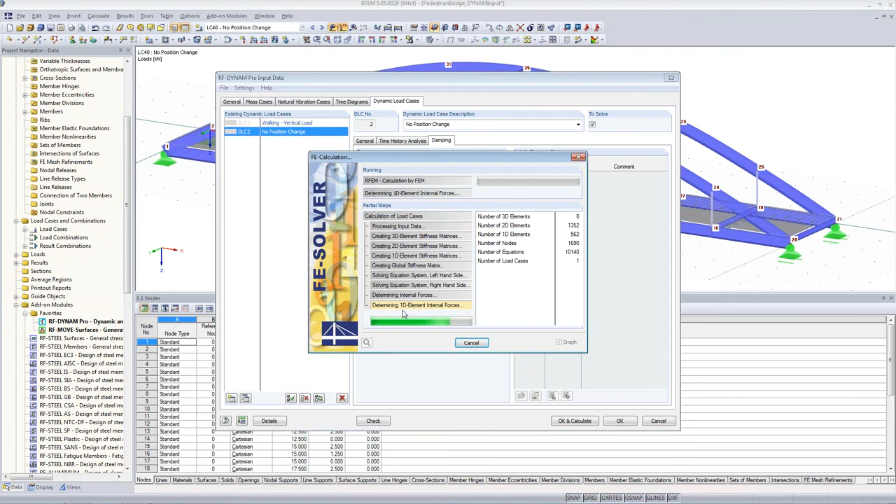And we have again a look into the time course monitor, and we will watch node 6. So I go to the DLC2 and I choose again my node number 6. I have a look at the displacement in Z direction. And here you see already we have a far larger maximum deformation, about 1 millimeter instead of just 0.4.

And the acceleration is the most important. We have peak values of 1.5 meters per square second, so above the limits we are allowed to. And I can also provide the root mean square up to 1 second, because this is the length of our time diagram. And here also it's far larger. Instead of just 0.09, we have nearly 0.4 meters per square second, which is still below the limits, but quite close.

So this is all I wanted to show you. We are finished now with the example in RF-DYNAM. I think this was quite a complex example, and just remember, similar to this, you can do whatever excitations you want. So you can simulate explosions, you can simulate the movement of bells in churches, you can simulate wind excitations, and so on. So you are quite flexible in load definitions and time diagram definitions.